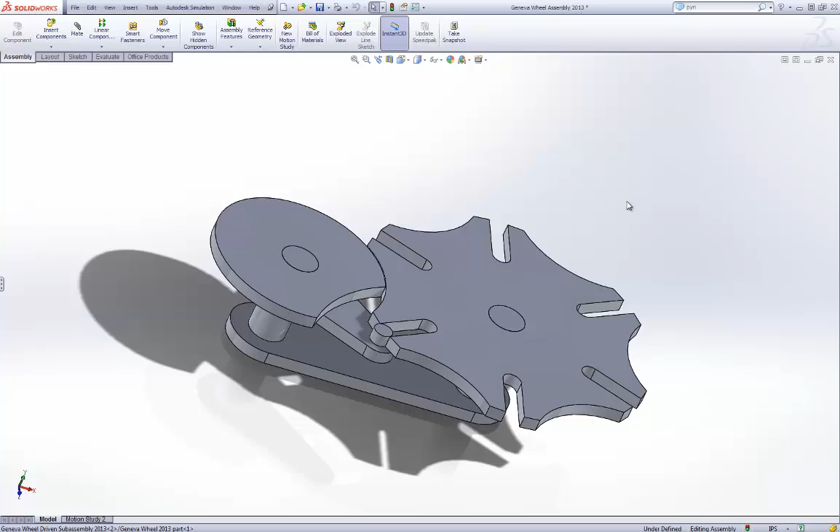Today we are going to work on a Geneva wheel project. Now this particular episode assumes that you've already done a number of solid modeling exercises, and so we will skip through some of those and go more towards the assembly side of things.

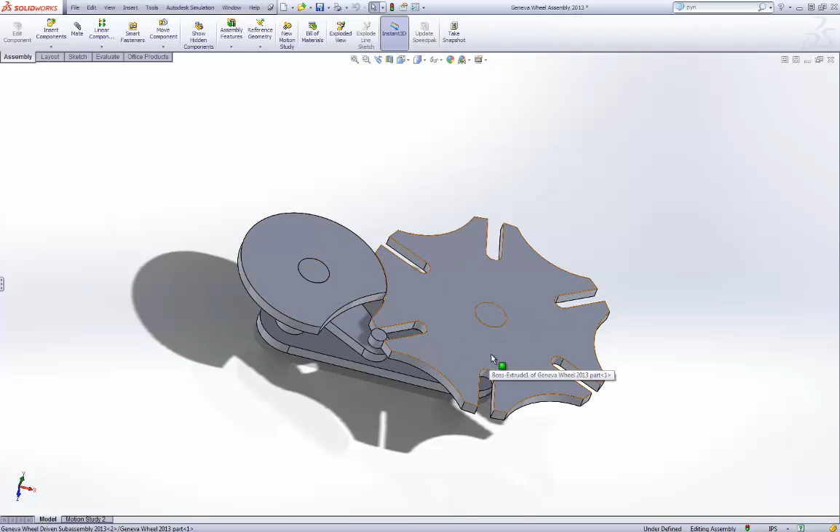This Geneva wheel mechanism translates rotational motion from this driver into intermittent motion by this Geneva wheel. In order to make it, most of the parts are pretty simple, with the exception of this Geneva wheel. So we're going to open up that part, and I'm just going to show you that all I did was use one sketch to create the whole thing.

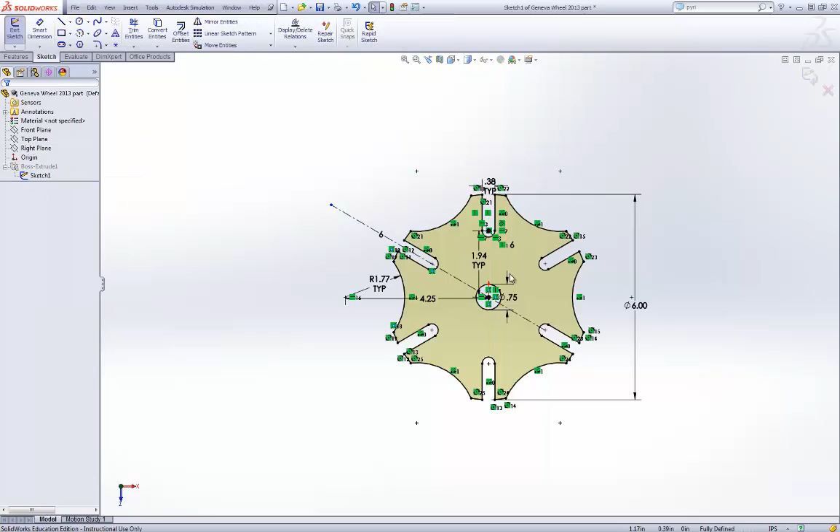And the first part was just done with a construction line at 30 degrees to horizontal, and it was constructed using just a few of these dimensions, but then a circular sketch pattern was used to translate it around to all 6 locations.

In so doing, it was made symmetric about those 3 axes, and it was fairly easy to copy it through to make that happen. There are other ways of doing this, maybe using multiple features, but in this case it makes the most sense to use just a single sketch.

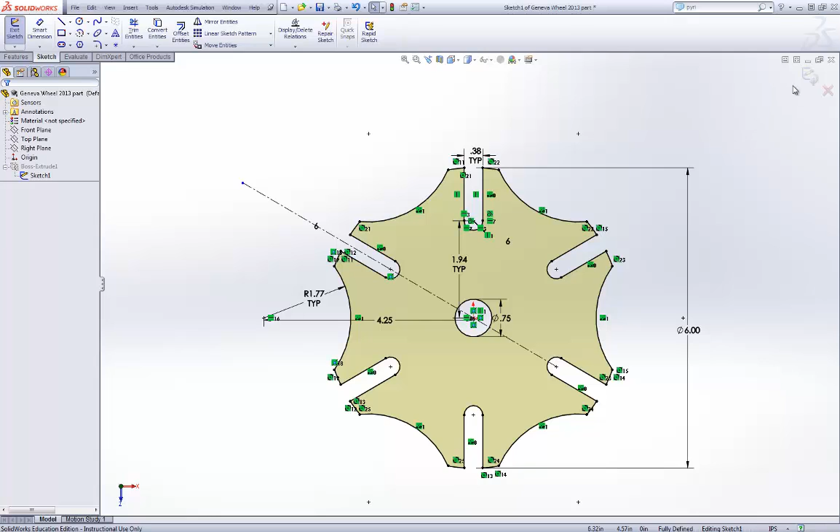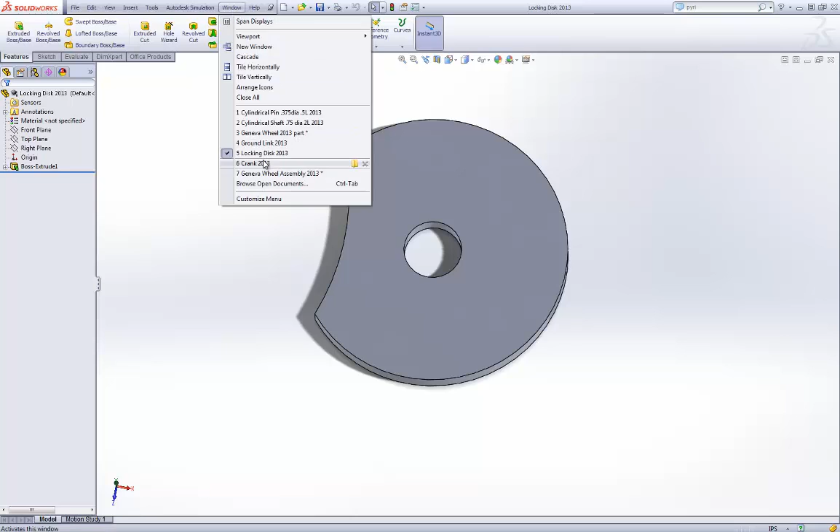Once that was completed, we needed to make the other parts, and the other parts are very simple: a pin, a shaft of a certain size. This is the ground link that connects the two, takes the place of the ground or some other machine that they're connected to, and the locking disc that interacts with the Geneva wheel, the crank that is used to drive it, and again, here is the entire assembly.

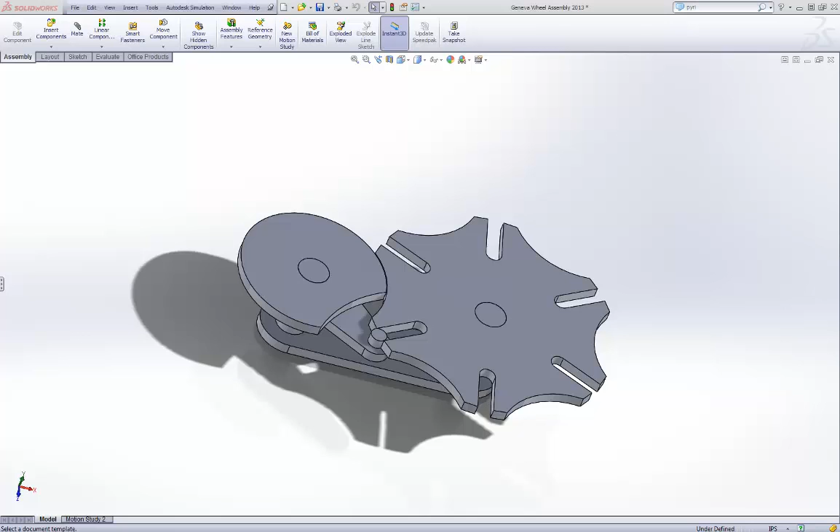So in order to create this assembly, we will want to make a new assembly. And it wants to know if we want to make an assembly, or say sure. And I'm going to start with the 2 sub-assemblies. First sub-assembly is pretty easy. We use the cylindrical shaft. There it is. There's our cylindrical shaft.

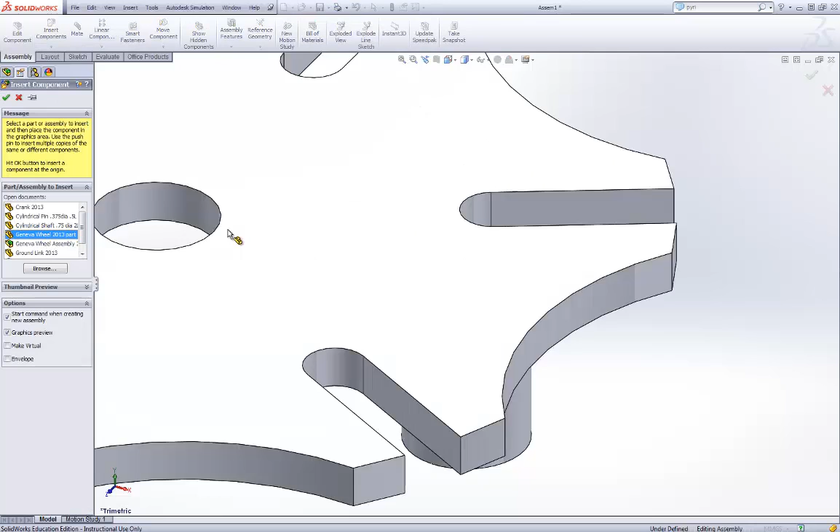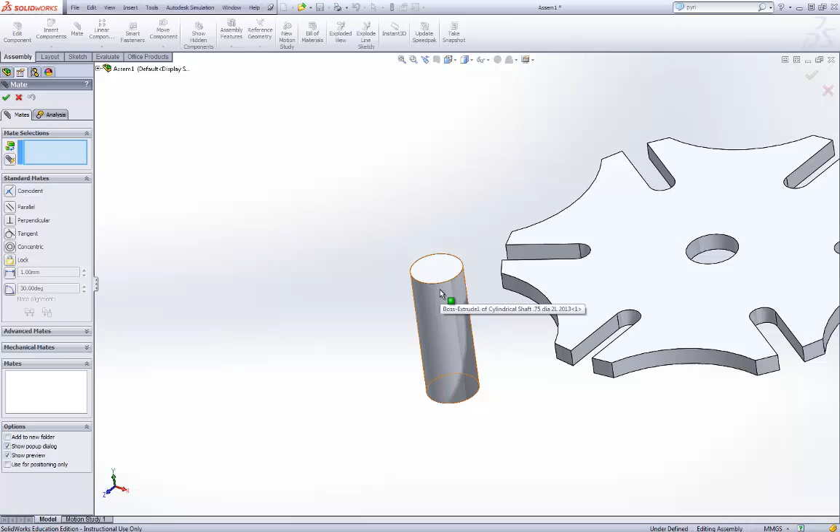And then to insert this component, the next one, I'm just going to click on here, and we're going to insert the Geneva wheel. And it just kind of floats out there in space, nothing to worry about. It's hard to tell where it is, so I just put it over here so we can easily access it. And all we're going to do is mate a couple of important aspects of it. So you can see that this surface goes inside here, so we just could click on that surface, and it knows to do that.

Once we're done with that, it considers it a concentric mate. That's fine. Make sure you hit this green check mark, otherwise you might get confused as to where you're at. But notice how it's not exactly where we want it. We want this surface to be up on this surface. And usually it's pretty smart.

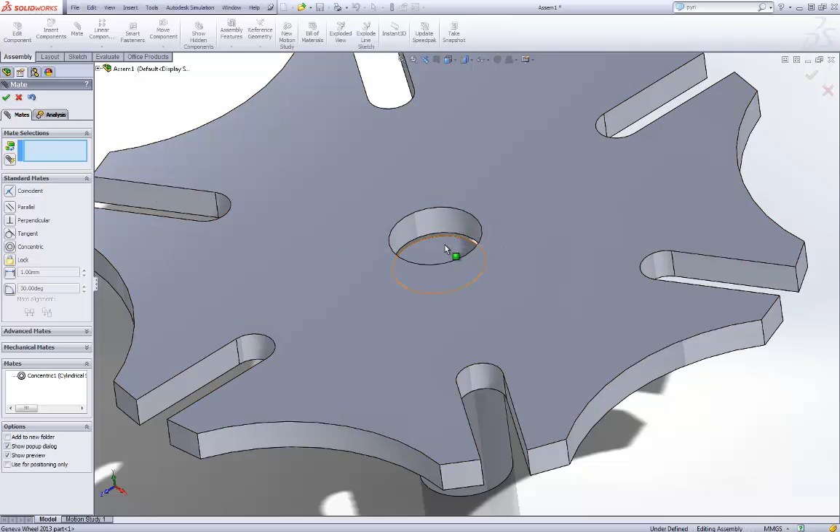We're still in the mate phase here, so I'm going to click on this surface and go up here, and lo and behold, it's exactly the way we want it. Don't forget to click on your green check mark. And in fact, our subassembly is completed. So just keep this as Assem1, and we're going to make a new assembly.

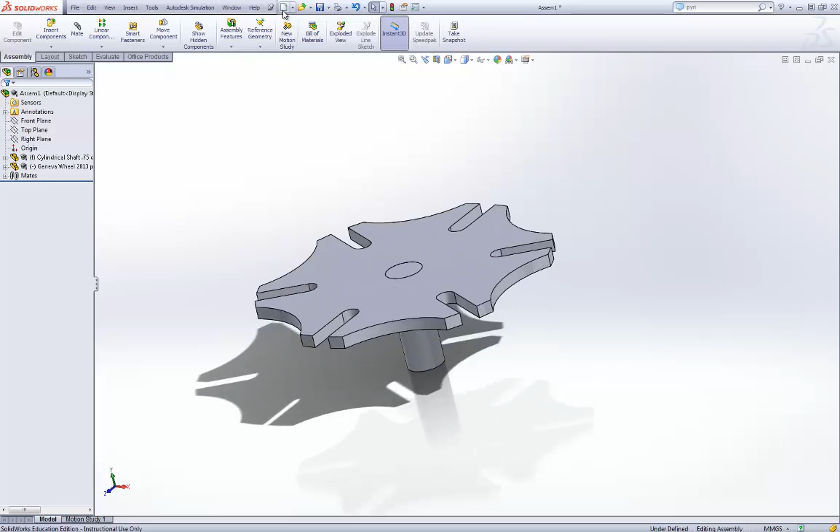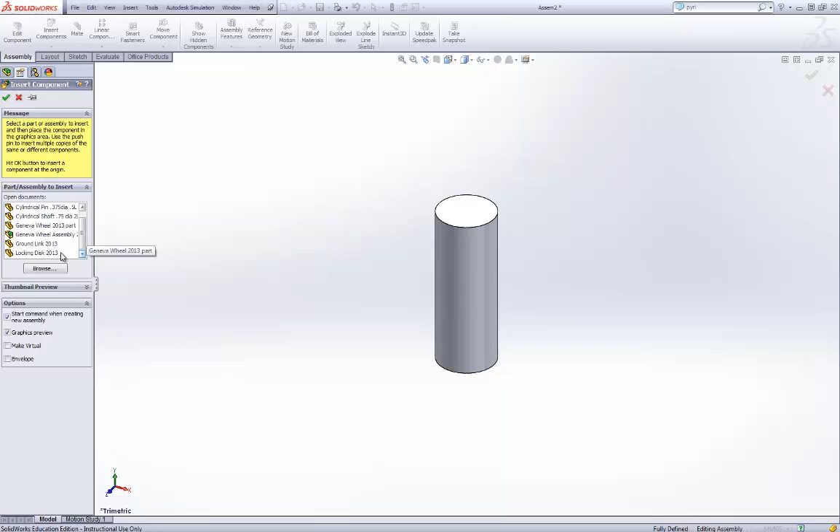These 2 that we're making are sub-assemblies. And we're going to start again with the cylindrical shaft. Just click anywhere in here. And then we're going to put on top of that the locking disc. So I'm going to insert a component. It's going to be the locking disc, which I happen to have already in memory because I opened up all these parts. That can help out a lot because then you'll find it over here. Otherwise, you'll have to browse for the parts.

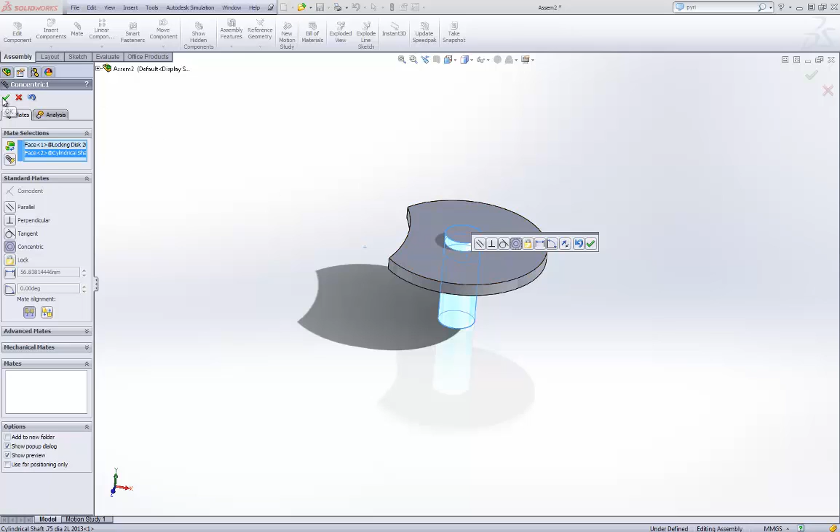So I'm going to do the exact same thing. I'm going to mate that surface with that surface. It knows that they are concentric. Hit the green check mark. And that surface with this surface, puts those together. And that's pretty well established. We're going to insert another component, which is the crank.

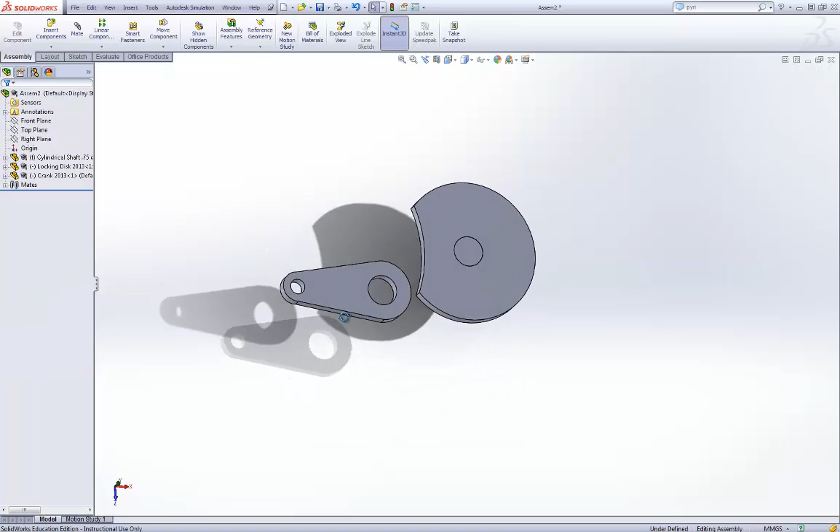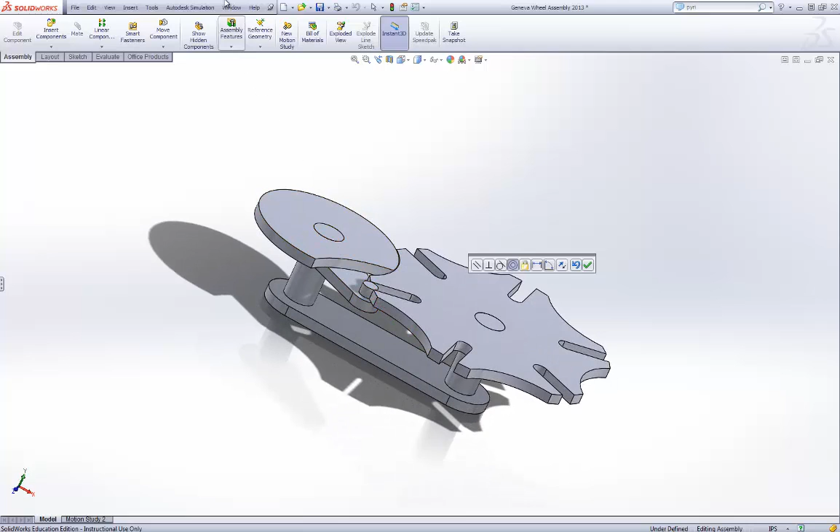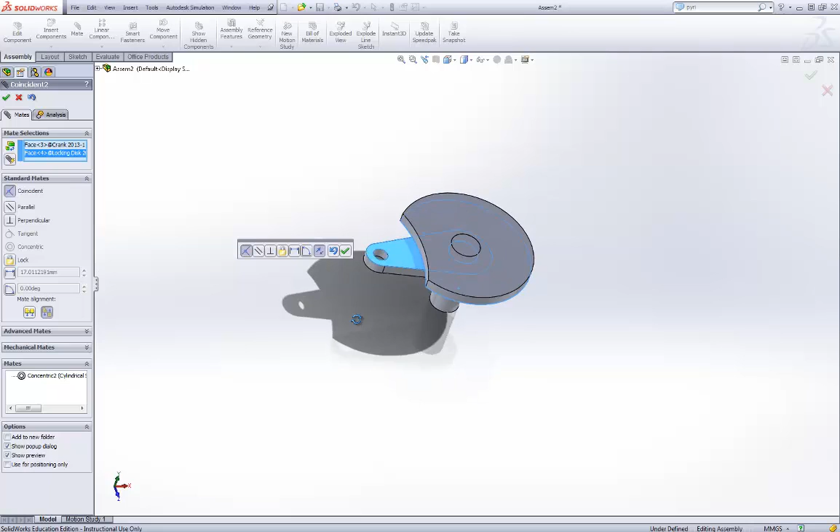Well, we're going to have a certain amount of difficulty here. We'll see why eventually. So here I'm going to mate again this surface with this surface. Now, if you'll notice, if we go to our assembly, that crank goes on underneath here, and that pin stays at the same level as the locking disc. So we'll go over there, get back to Assem2, and we're going to see, it's supposed to go underneath. So what I want to do, make sure I hit that green check mark, then mate this top to this bottom. That's better. Alright, good to go with that.

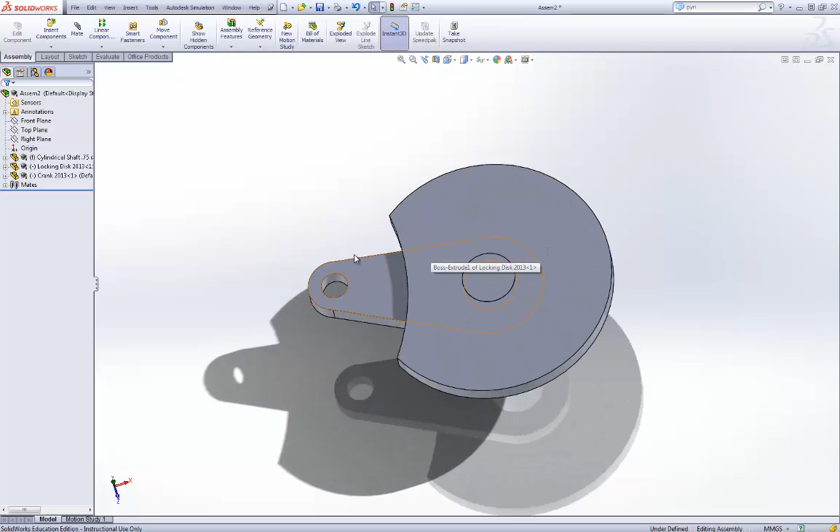The problem is, if I move this crank, it doesn't bring the locking disc with it. And if I move the locking disc, it doesn't bring the crank with it. The locking disc and the crank need to be assembled together. And a big question is, how do we do that? There's no specific point here that can be on a point there, or a nice face or anything like that. Well, if you can't figure it out, then you're forgetting all the great reasons that we've been working on design intent from the get-go.

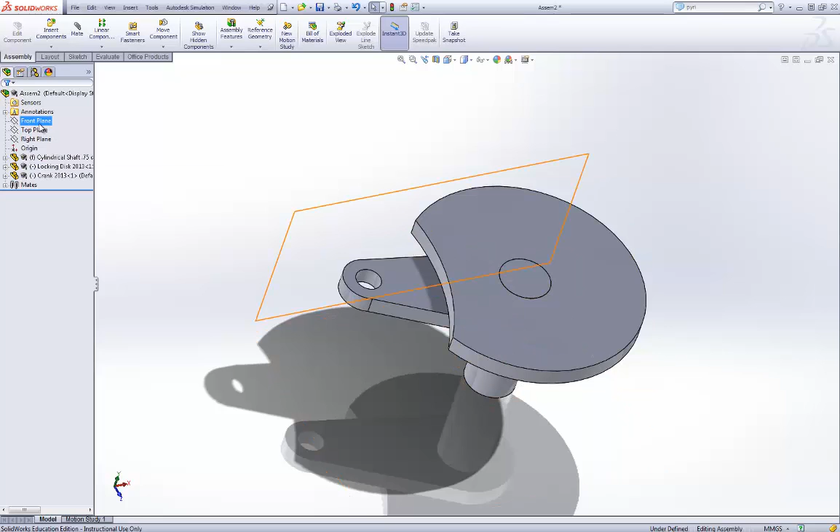We made this locking disc here with front, top, and right planes, and that front plane goes right down the middle, just right where we would want the crank to go. So let's look at the crank. Does it have the same thing? Hey, look, if we are able to mate those two, and we would have had to think about that at the very beginning of our design, then we're all set. We don't have to do too much.

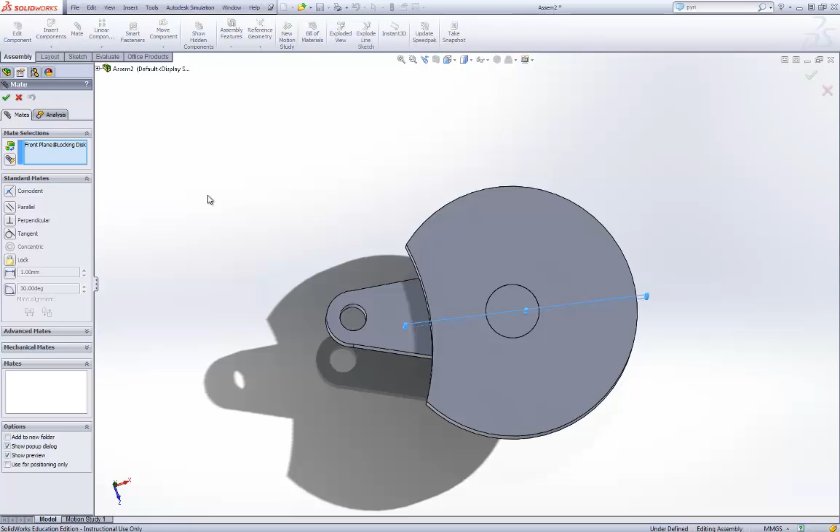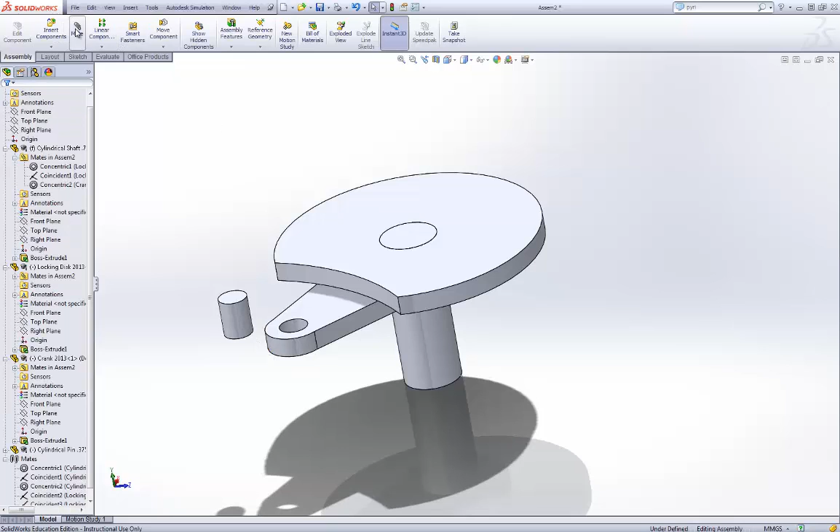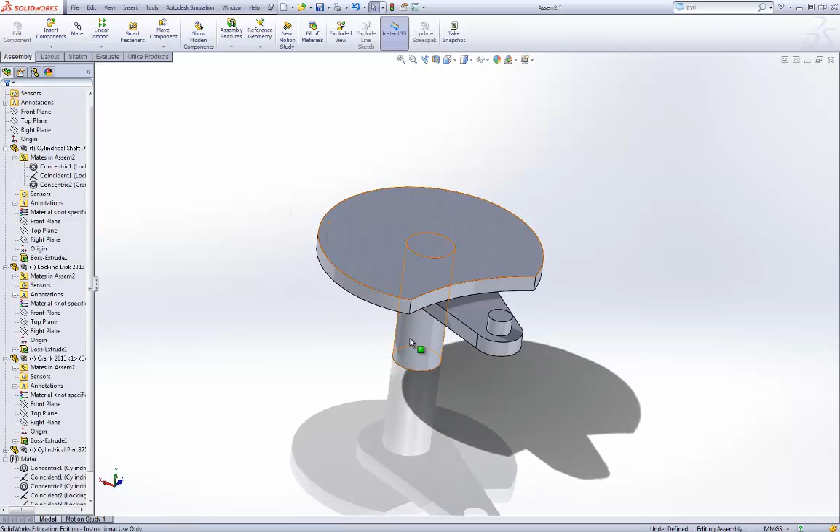It's pretty easy. Just click on mate. I'm going to take that front plane, which I've already selected, and I'm going to go to the front plane of the other one, and voila, they are going to work together. So now all that works together. To finish off this subassembly, we'll simply insert the small pin, and again use another mate for this surface to this surface, and then mate that to here, and that will do it for the driver subassembly.

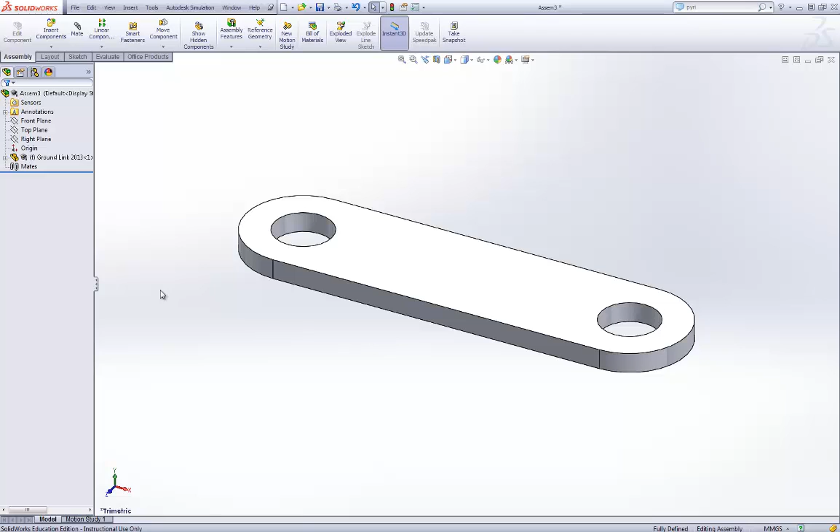Now to make the full assembly, make another assembly here. That's going to end up being Assem3. And remember, an assembly can take either parts or even subassemblies. So we're going to first make sure you put the ground link in. Otherwise, we've got to go back and take care of some other things. So make sure the ground link goes first. And if you'll notice, it comes up with an F here. That means it's fixed. The first part is usually what you want to have stable. So it automatically fixes that part in space.

Now that I have the ground link in this assembly, I'm going to insert other components. Now in order to do that, I need to click here, and the components that I have in memory will show up here. But in order to get them in here and put them into the assembly, they need to be saved first. So I'll show you them in this situation. I'm going to save this. Right now it's in Assem3. I'm going to save as, and here are my two subassemblies. I saved them in the meantime. Didn't have to show you all that.

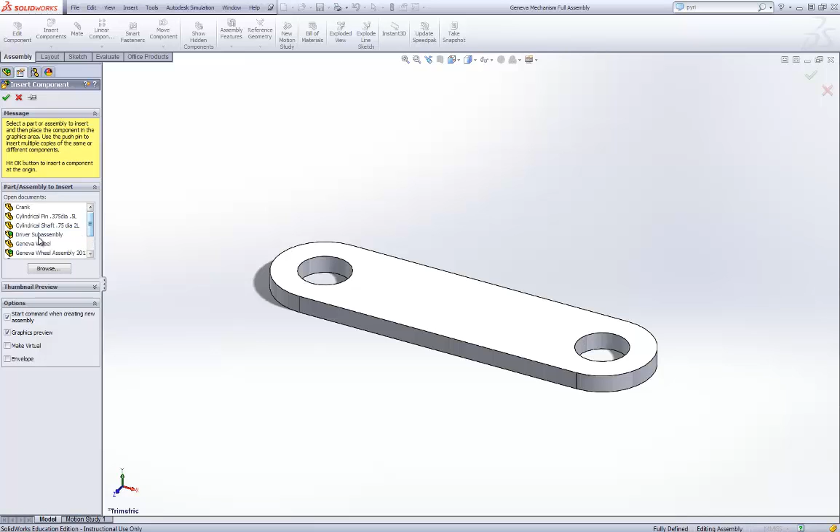And Geneva mechanism full assembly. There we go. So now that shows up here, and now I'll continue to insert my components. First one I'll do is the driver subassembly. Put that out here, and I'm going to mate that part of the shaft with the internal here, and then that with this.

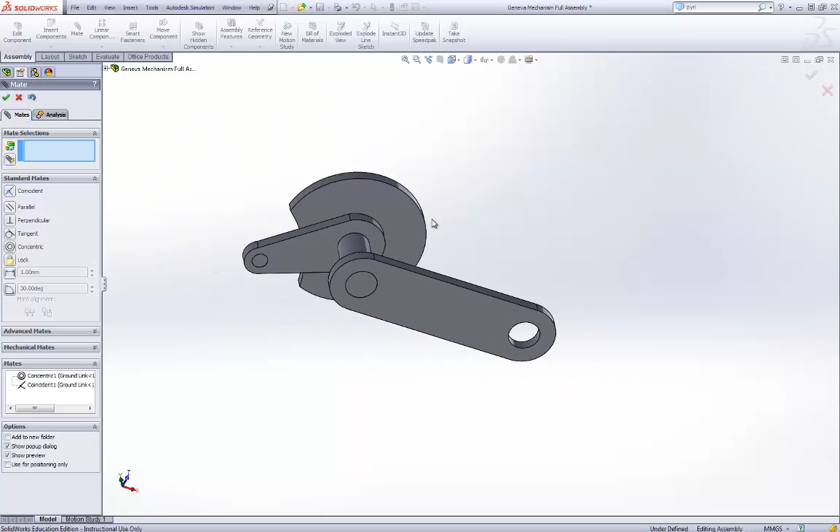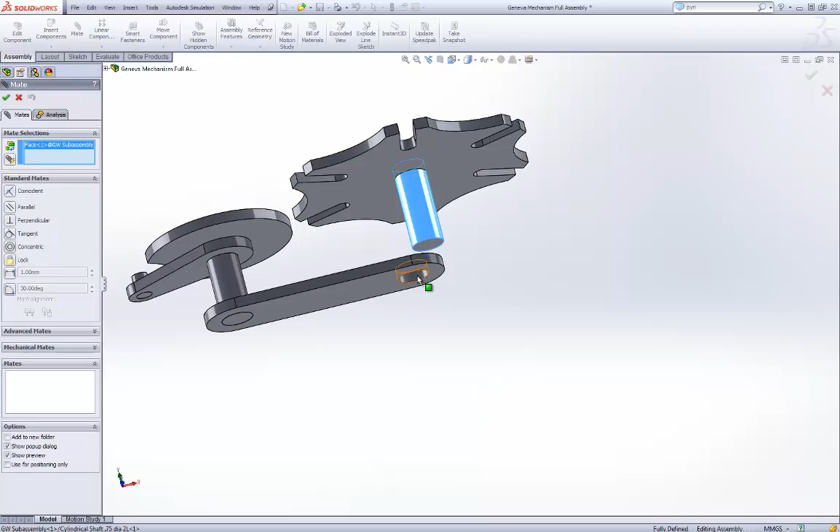Then I will insert another component, which is the Geneva wheel subassembly, and I will mate that part of the shaft to that. Click the green check mark, and here we go. Now this just happened to come in all nice set up like this because I set up the planes appropriately. But these two you should check to make sure that they both rotate.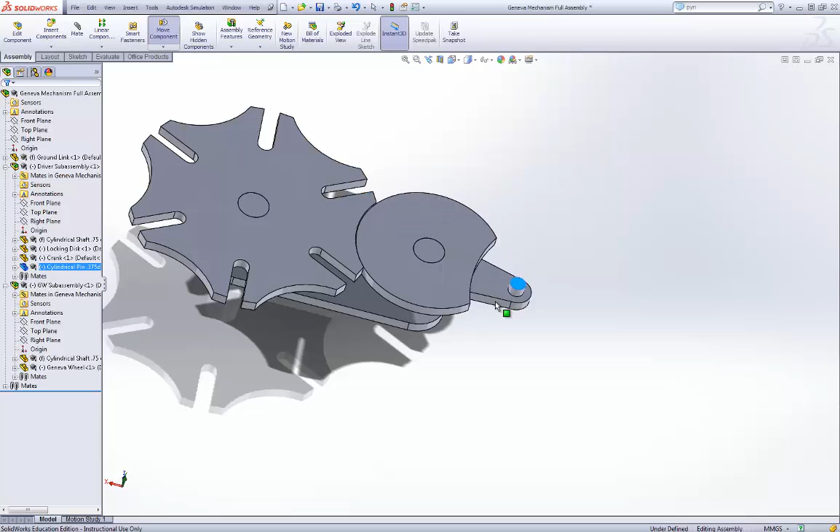Now notice how this is rotating right through the other solid model. Yes, it doesn't know the difference. We will show it how to see the difference, but most of the time you'll be working with parts that can't actually run right through each other. So here is the Geneva mechanism in its assembled form.

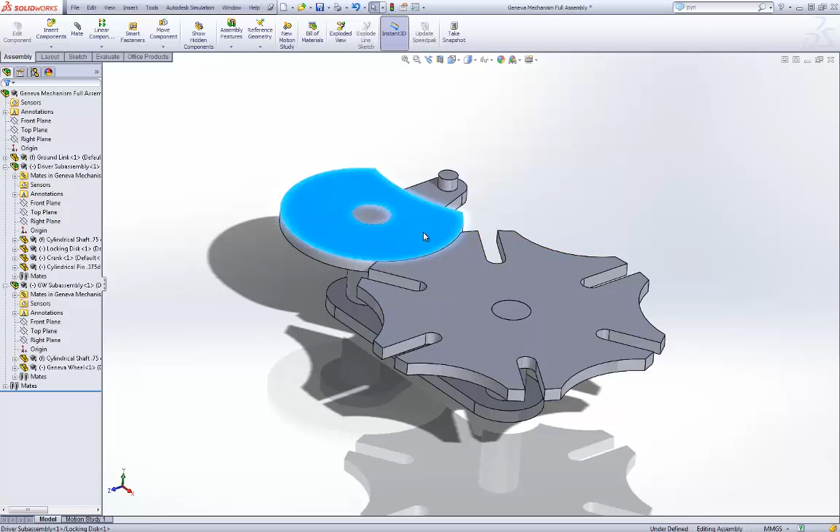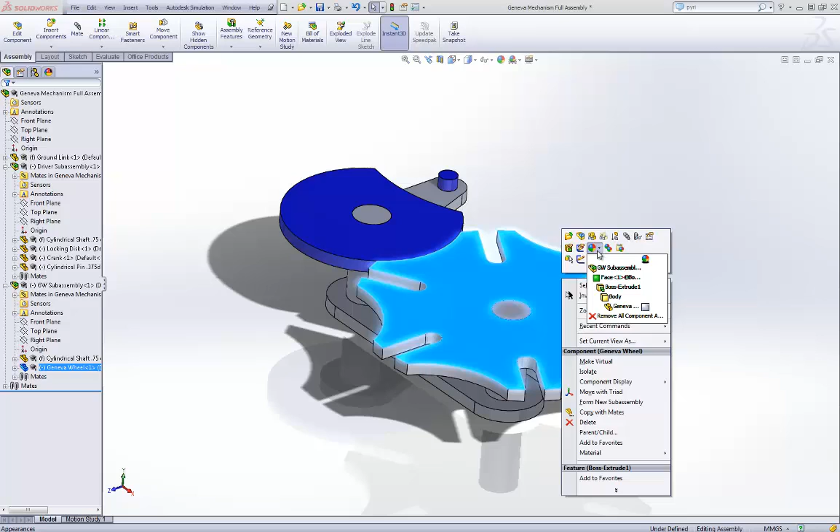It may help to change the part colors. And we'll change it into a nice pretty blue. Got a pretty blue. And maybe that's there. Now it's easier to see the different parts.